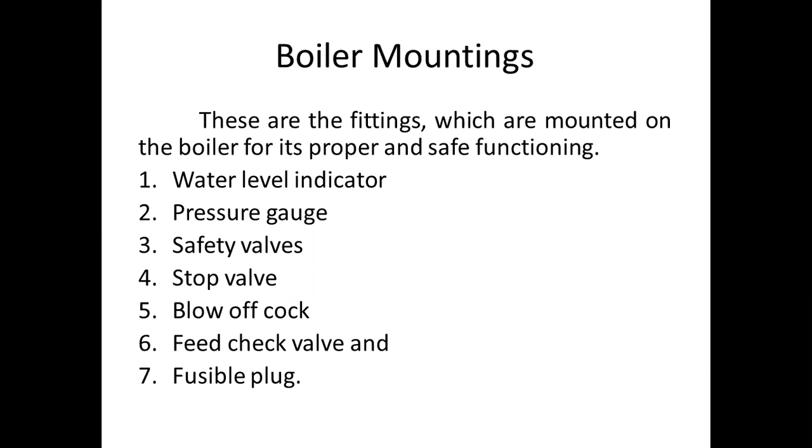There are many types of boiler mountings. Number one, water level indicator. Number two, pressure gauge, safety valves, stop valve, blow off cock, feed check valve, and fusible plug.

Water level indicator. It is an important fitting which indicates the water level inside the boiler to an observer. It is a safety device upon which the correct working of the boiler depends. This fitting may be seen in front of the boiler and they are generally two in number. A water level indicator is mostly employed in the steam boiler. It consists of three cocks and a glass tube.

Steam cock C1 keeps the glass tube in connection with the steam space. Water cock C2 puts the glass tube in connection with the water in the boiler. Drain cock C3 is used at frequent intervals to ascertain that the steam and water cocks are clear.

In the working of the steam boiler and for the proper functioning of the water level indicator, the steam and water cocks are opened and the drain cock is closed. In this case, the handles are placed in a vertical position. The rectangular passage at the ends of the glass tube contains two balls. In case the glass tube is broken, the two balls are carried along its passages to the ends of the glass tube. It is thus obvious that water and steam will not escape out.

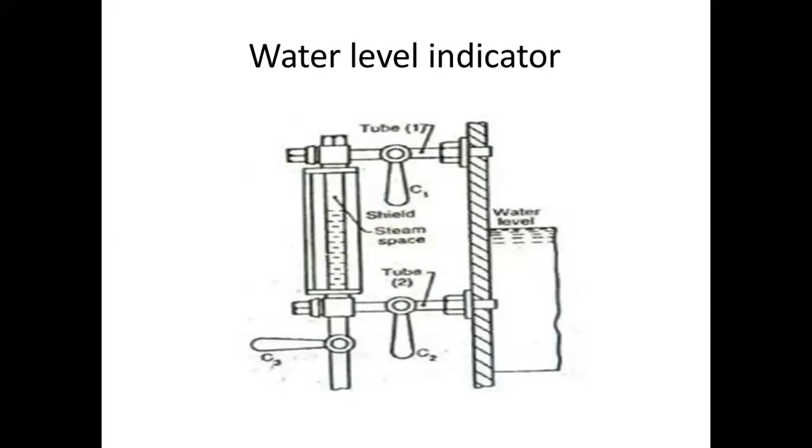Pressure gauge. The pressure gauge is used to measure the pressure of the steam inside the steam boiler. It is fixed in front of the steam boiler. The pressure gauges generally used are of Bourdon type. A Bourdon pressure gauge in its simplest form consists of an elliptical elastic tube bent into an arc of a circle. This bent tube is called Bourdon tube.

One end of the tube is fixed and connected to the steam space in the boiler. The other end is connected to a sector through a link. The steam under pressure flows into the tube. As a result of this increased pressure, the Bourdon tube tends to straighten itself. Since the tube is encased in a circular curve, it tends to become circular instead of straight.

With the help of a simple pinion and sector arrangement, the elastic deformation of the Bourdon tube rotates the pointer. This pointer moves over a calibrated scale which directly gives the gauge pressure.

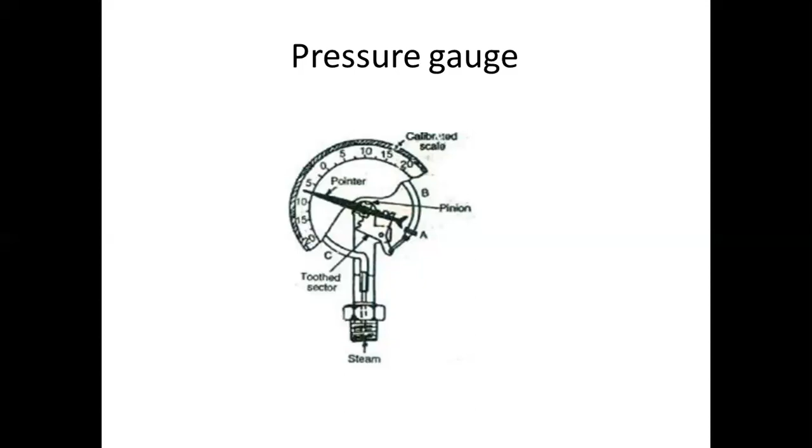Safety valve. These are the devices attached to the steam chest for preventing explosions due to excessive internal pressure of steam. A steam boiler is usually provided with two safety valves. These are directly placed on the boiler. In brief, the function of a safety valve is to blow off the steam when the pressure of the steam inside the boiler exceeds the working pressure.

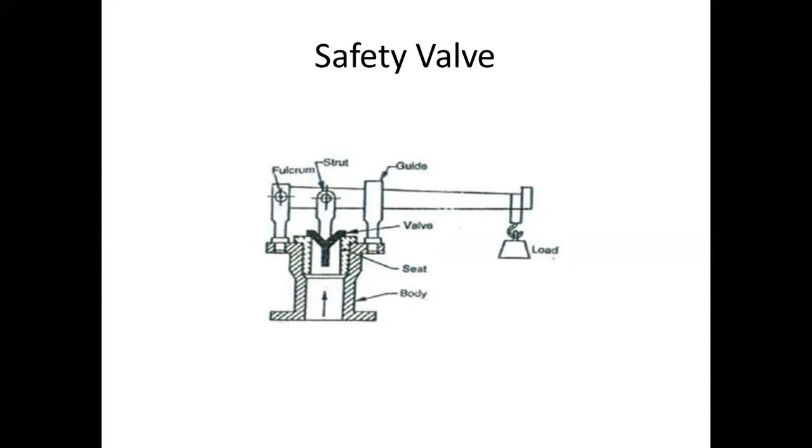Steam stop valve. It is the largest valve on the steam boiler. It is usually fitted to the highest part of the shell by means of a flange. The principal functions of a stop valve are to control the flow of steam from the boiler to the main steam pipe, and to shut off the steam completely when required.

The body of the stop valve is made of cast iron or cast steel. The valve seat and the nut through which the valve spindle works are made of brass or gunmetal. The spindle passes through a gland and stuffing box. The spindle is rotated by means of a hand wheel. The upper portion of the spindle is screwed and made to pass through a nut in a cross head carried by two pillars. The pillars are screwed in the cover of the body.

The boiler pressure acts under the valve so that the valve must be closed against the pressure. The valve is generally fastened to the spindle which lifts it up. A non-return valve is sometimes fitted near the stop valve to prevent the accidental admission of steam from other boilers. This happens when a number of boilers are connected to the same pipe and one is empty and under repair.

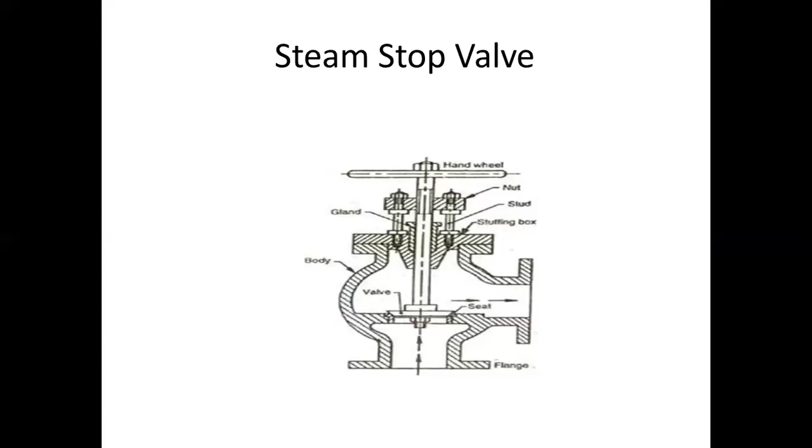Blow-off cock. The principal functions of a blow-off cock are to empty the boiler when required, and to discharge the mud, scale, or sediments which are accumulated at the bottom of the boiler. The blow-off cock is fitted to the bottom of a boiler drum and consists of a conical plug fitted to the body or casing. The casing is packed with asbestos packing in grooves round the top and bottom of the plug. The asbestos packing is made tight and the plug bears on the packing.

It may be noted that cocks packed in this way keep the grip better under high pressure and are more easily operated than unpacked ones. The shank of the plug passes through a gland and stuffing box in the cover. The plug is held down by a yoke and two stud bolts. The yoke forms a guard on it. There are two vertical slots on the inside of the guard for the box spanner to be used for operating the cock.

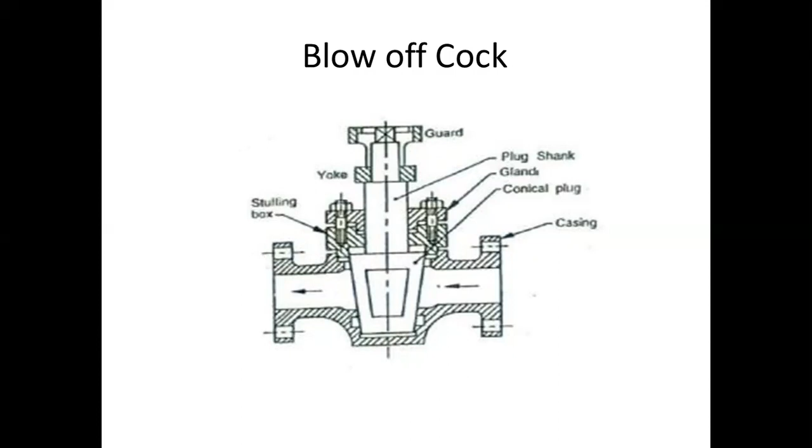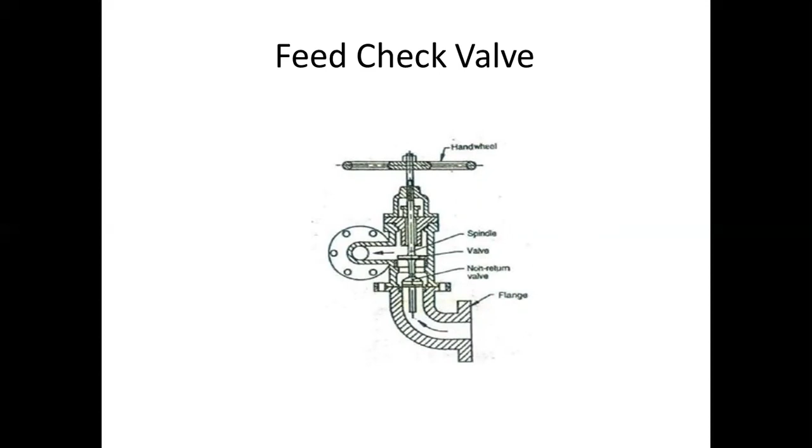Feed check valve. It is a non-return valve fitted to a screwed spindle to regulate the lift. Its function is to regulate the supply of water which is pumped into the boiler by the feed pump. The valve must have its spindle lifted before the pump is started. It is fitted to the shell slightly below the normal water level of the boiler.

Fusible plug. It is fitted to the crown plate of the furnace or the fire box. Its object is to put off the fire in the furnace of the boiler when the level of water in the boiler falls to an unsafe limit, and thus avoid the explosion which may take place due to overheating of the furnace plate.

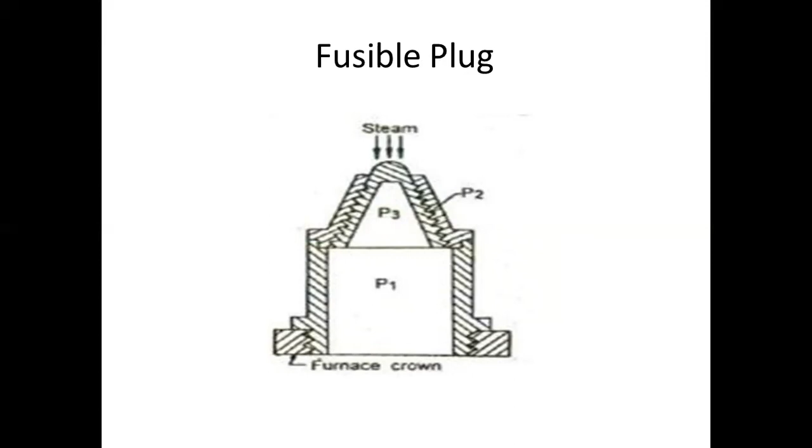Boiler accessories. These are the devices which are used as integral parts of a boiler and help in running it efficiently. There are many types of boiler accessories. Number one, feed pump. Number two, superheater. Number three, economizer. And number four, air preheater.

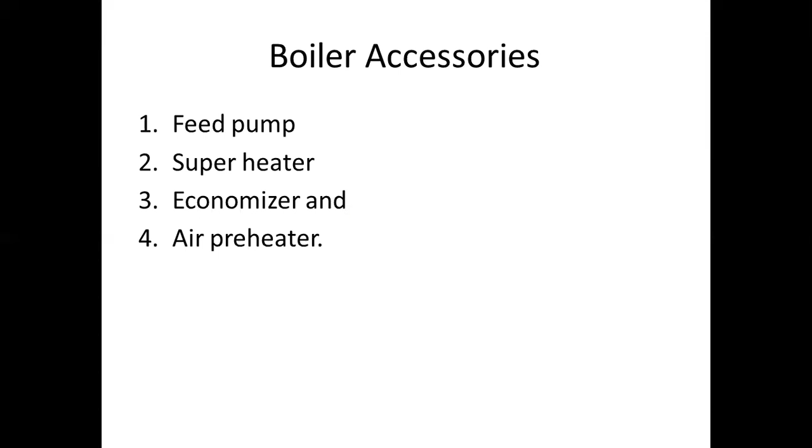Feed pump. We know that water in a boiler is continuously converted into steam, which is used by the engine. Thus, we need a feed pump to deliver water to the boiler. The pressure of the steam inside a boiler is high, so the pressure of feed water has to be increased proportionately before it is made to enter the boiler. Generally, the pressure of feed water is 20% more than that in the boiler.

A feed pump may be of centrifugal type or reciprocating type, but a double-acting reciprocating pump is commonly used as a feed pump these days. The reciprocating pumps are run by the steam from the same boiler in which water is to be fed. These pumps may be classified as simplex, duplex, and triplex pumps according to the number of pump cylinders.

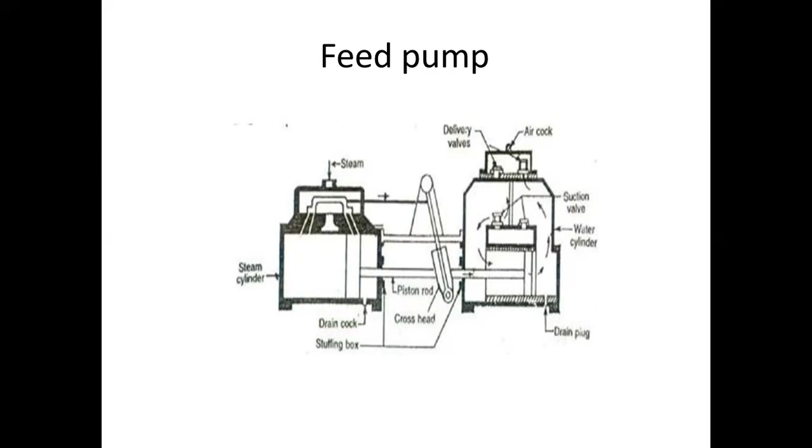Superheater. A superheater is an important device of a steam generating unit. Its purpose is to increase the temperature of saturated steam without raising its pressure. It is generally an integral part of a boiler and is placed in the path of hot flue gases from the furnace. The heat given up by these flue gases is used in superheating the steam. Such superheaters which are installed within the boiler are known as integral superheaters.

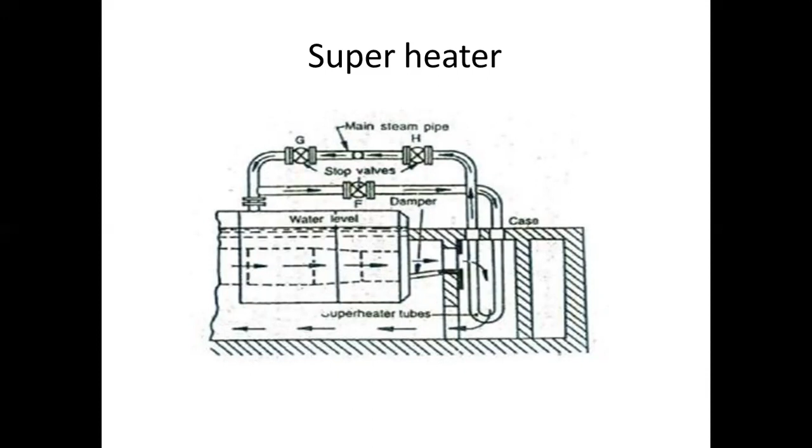Economizer. An economizer is a device used to heat feed water by utilizing the heat in the exhaust flue gases before leaving through the chimney. As the name indicates, the economizer improves the economy of the steam boiler. A well-known type of economizer is Green's economizer. It is extensively used for stationary boilers, especially those of Lancashire type.

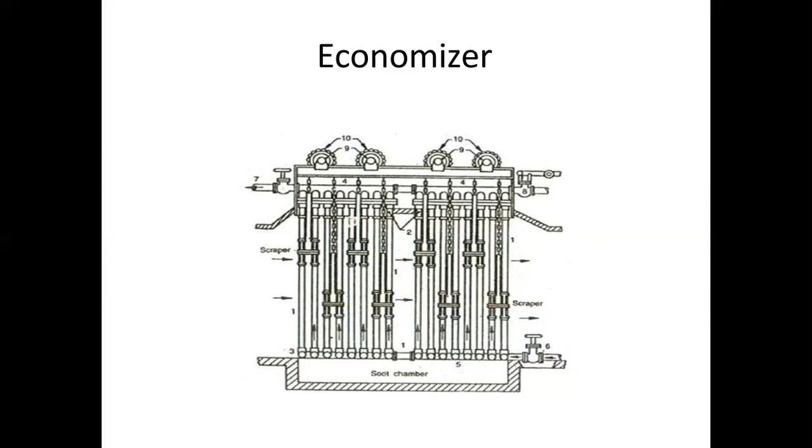It consists of a large number of vertical pipes or tubes placed in an enlargement of the flue gases between the boiler and chimney. These tubes are 2.75 meters long, 114 mm in external diameter and 11.5 mm thick, and are made of cast iron.

Air preheater. An air preheater is used to recover heat from the exhaust flue gases. It is installed between the economizer and the chimney. The air required for the purpose of combustion is drawn through the air preheater where its temperature is raised. It is then passed through ducts to the furnace. The air is passed through the tubes of the heater internally while the hot flue gases are passed over the outside of the tubes. The following advantages are obtained by using an air preheater.

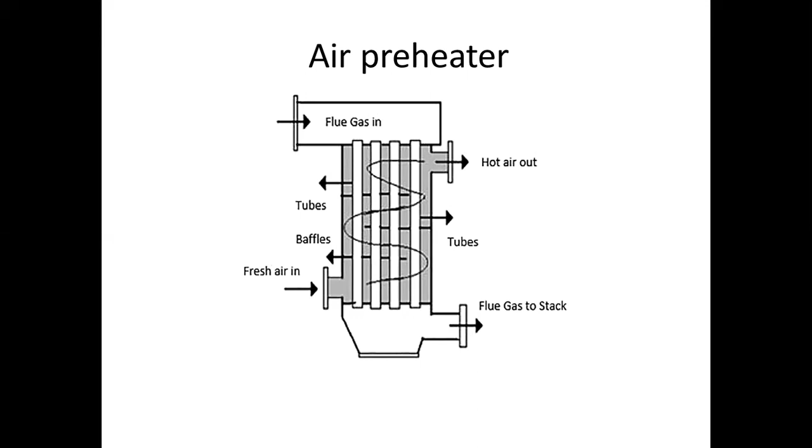Number one, the air preheater gives higher furnace temperature. Air preheater results in better combustion with less smoke and ash. Air preheater enables a low-grade fuel to be burned with less excess air.